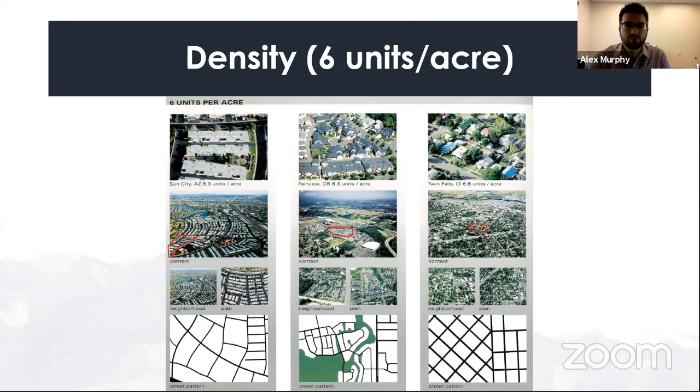That 6 units per acre, by the way, would be functionally equivalent to our single family 1 zone. This is about our single family 2 zone at approximately 8 to 9 units per acre. Again, you can see a variety of housing types. We've got on the left the Portland example that's right under 9, which is all single family detached. Tampa in the middle is really more of a mobile home park, but still kind of that same density. Chicago on the right has a little bit more intensity.

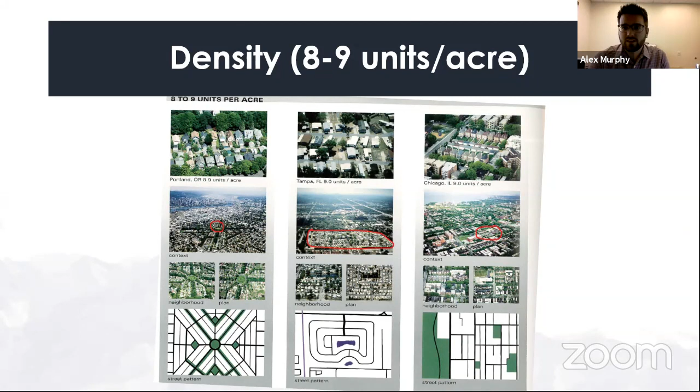And then on the high end, we allow up to about 12.4 at the maximum. Here's a few examples of what that looks like in a couple different places across the country. This book is here in the office if you ever want to take a look. It ranges from less than 1 unit per acre to well over 100 units per acre.

So you can get an idea of what that density looks like on a wide range of scales. The reason I mention that is thinking about density only is just one factor that comes into play when talking about residential development, whether it's single family or multifamily. There's a lot more that goes into development and community building than just the density.

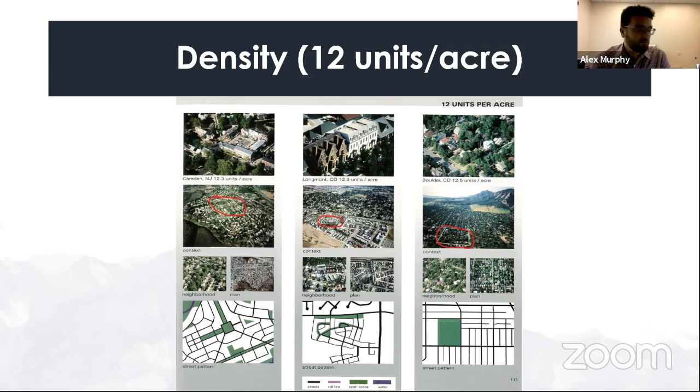Master plan developments are one way to see that happen. Master plan developments, or as some other folks call them, planned unit developments, are intended to provide flexibility in design and use. So you have a wide variety of housing types, unit sizes, etc. And in some places where appropriate, this includes providing mixed uses.

If you try and search for master plan development on the internet, you'll typically find a lot of conversation about large mixed use developments, where it's maybe like a movie theater surrounded by a shopping mall with apartments, that kind of thing. We don't tend to have that sort of scale in Midvale, but that's kind of the idea, allowing a variety of use types where they're appropriate.

Master plan developments allow the developers to consider overall community goals, and in doing so, typically receive exceptions to some specific or rigid requirements. That might be something like there's a density limit and a perimeter setback, but inside you can get some waivers to lot sizes or to building setbacks or various things like that.

Master plan developments typically result in common areas and common maintenance. So you'll have an HOA, you'll have a higher expectation of maintenance on some of those, because it's one entity responsible for maintaining a larger area. That typically allows them to provide amenities, design, and architecture that's not typical of your single family detached. That's true whether you're in Midvale, Salt Lake, California, or New York. That's generally how they're applied across the board.

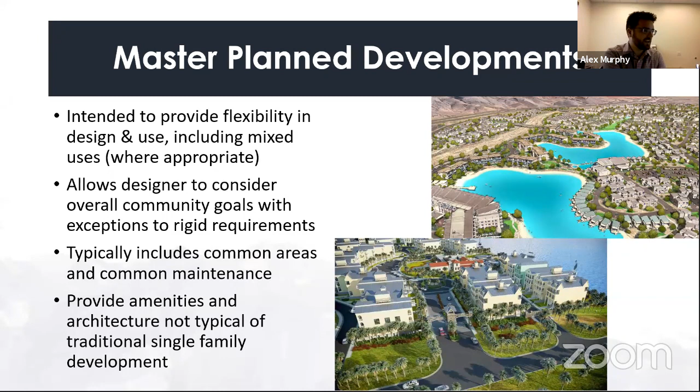When looking at them in Midvale, we've had master plan development provisions in the zoning ordinance for at least 20 years. I found it in a very old zoning ordinance that was originally adopted in the 80s, but I couldn't tell if it was adopted in the 80s or at some point afterwards.

In Midvale, we do have a minimum size requirement of 1 acre, so master plan developments aren't permitted on property less than that in size.

We establish a 50% open space requirement, which is the highest open space requirement of any project type in the city. Usually we're seeing somewhere in the 10 to 40%, depending on whether you're commercial, industrial, or multifamily residential. Master plan developments are expected to provide a higher quality development, so they have that higher standard.

As part of that open space, there's also a requirement for some improved amenity areas, including things like playgrounds, parks, picnic areas, sport courts, etc. We tend to provide flexibility to the developer in choosing what those are, because we don't necessarily have the market expertise to pick what should be installed there, but we do have that minimum area, so we'll get something as far as improved amenities are concerned.

We do require a pedestrian network, so there needs to be a series, or at least some sort of trail system, that connects within the project and to the surrounding public network. Typically, that means we're seeing connections from the private streets to the public streets, and then within the project between the units and the amenity spaces, so that folks can walk around conveniently and easily from space to space.

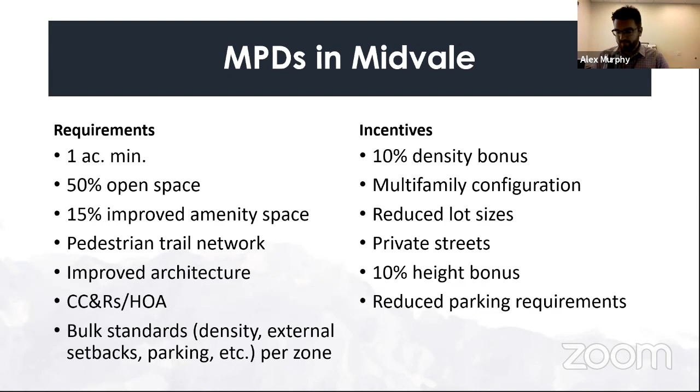To piggyback on that, they also don't necessarily have to follow the same quality standards in the road, right? Like how deep they do their asphalt, or require sidewalks on both sides, things along those lines, correct? Like with a private road?

The construction of the road itself isn't defined by the zoning ordinance, so usually it's reviewed by the city engineer, and if there are concerns, he'll call them out. They do typically need to build it to a standard that can support a fire truck, that's a pretty heavy vehicle. So we at least have that part for where the fire turnaround is. And most of our master plan developments are small enough that the road is where the fire department will be, so they don't really have the flexibility to create a substandard road anywhere else.

Sidewalks is one area. We do allow two options for sidewalks in our private road standards. You can either have a 5-foot sidewalk on both sides with a monolithic curb, so there's no park strip, you'd have the road, curb and gutter, and sidewalks. Or you can do a park strip and sidewalk on one side, so you'd have the road, curb and gutter on both sides, but a park strip and sidewalk only on one.

That option isn't used as often because it tends to create difficulties meeting the pedestrian network requirement. So we like to push people toward more sidewalks and less dead open space or dead landscaping when reviewing those projects. We'll really only accept, at least at the staff level, the single sidewalk if there's a really good network on the other side of the building, for instance.

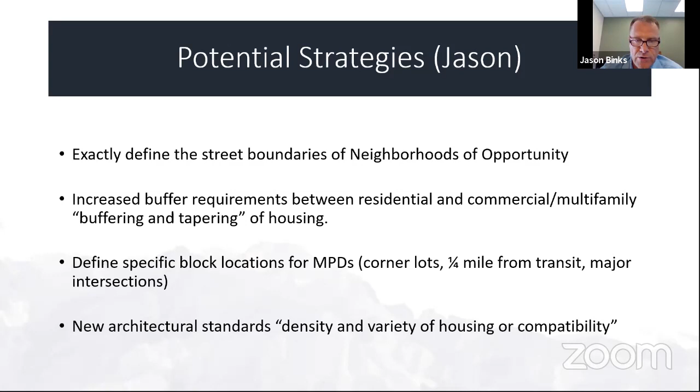And then finally, along the lines of what Councilman Glover was saying, when a developer comes in with a fourplex, for example, they provide a home product that's urban, chic, modern—different materials, different faceting, different bulk. That may not go well with a traditional single family home or a neighborhood developed in the 50s and 60s. So it kind of sticks out, it's different, and it causes some concern. So those are 4 quick ideas from someone who hasn't been in the city, but has been in different cities and sees these kinds of things.

Great, Jenna's going to take us through this.

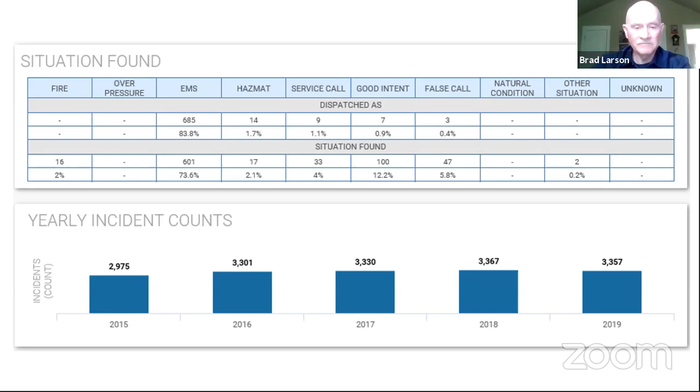The yearly incident counts, you can see 2019 count there. Of course, we won't have 2020 for a while. Top five fire dispatches: structure fires were 6 for the quarter, outside fires were 3 for the quarter. That's going to go up given last weekend, on the next quarterly report, and so on.

The top 5 medical descriptions that we were dispatched on: a sick person, that could be anywhere from a diabetic problem, COVID calls perhaps, or some other illness. And of course, falls is always quite high in the Midvale area.

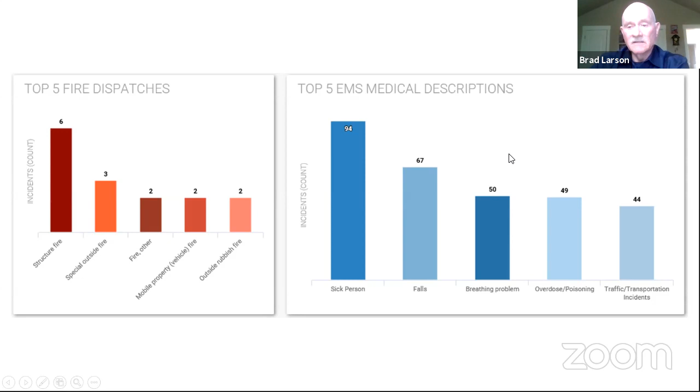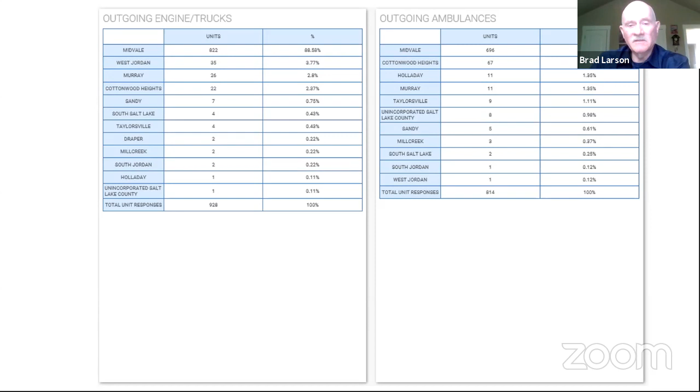So that gives us a good idea of our mutual response, the number of times other units come in to help us and the times that we go out to help them. Top 5 other dispatches - this just gives us the other calls that we went on and the number of times.

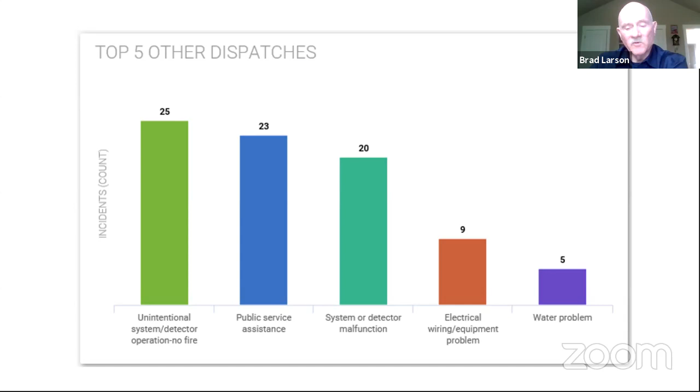Okay, are there any questions on any of those?

Okay Chief, I actually have a question. Sorry, I was trying to hit the right buttons here. Here I am. So back to that slide.

Does it seem that we're a little bit more generous in the number of times we send our response teams out versus other communities sending theirs in?

Yeah, and that can vary from month to month, you know. It's dynamic. I mean, we can look at the numbers long term. It really helps us during the board meetings and budgeting and those type of things when we're looking at all those numbers as a whole for the board members to talk about, to make sure that things are fair and equitable.

However, keep in mind that a lot of those are UFA units. They come out of Cottonwood Heights, they come out of Millcreek. And the same as when we go in to assist them. For example, some of the large field fires or house fires that we may have here in Midvale, we've got plenty of resources to pull from.

So it's a real advantage that way. And departments all across this valley have mutual aid agreements. And there's always the question of, well, we're sending more here, but next year that might change. So we just have to kind of keep an eye on that and make sure it isn't a burden on the community we're based in.

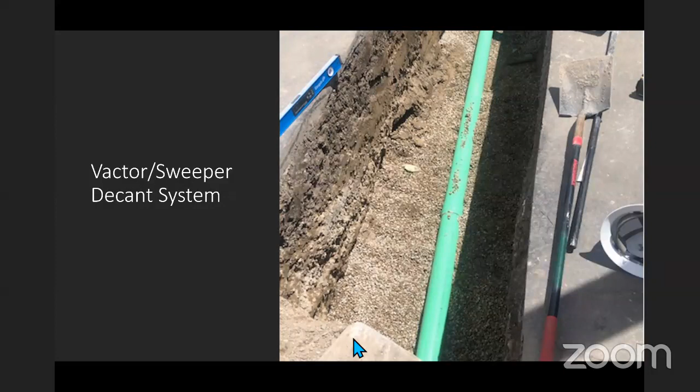Sweet, thank you, sorry. We found a line that was installed with a belly in it, and Roland's crew, the Storm and Streets crew, went in and replaced it. The benefit here is we were having to spend at least one day a week maintaining that system and cleaning it so it would function. Since we've done this, three weeks ago, we have not had to perform any maintenance on it yet, so we're probably looking at going from once a week to once a month. That was really good by their crew. That's what the patch looks like after. So some time saving on maintenance in the yard, which can be spent on maintenance in the city.

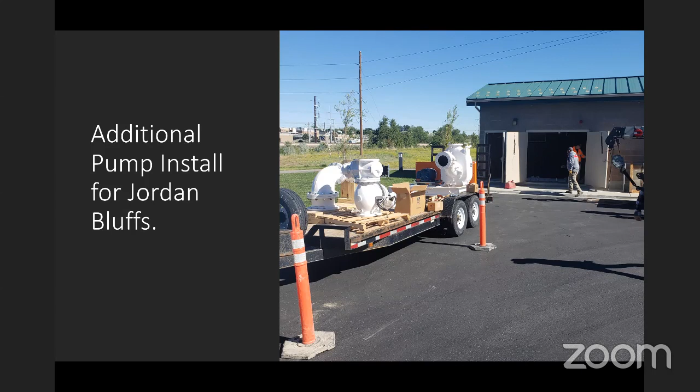Additional pump install for the Jordan Bluffs. This kind of segues into impact fees, where we don't utilize impact fees—this is an example of maybe where they could be used. As Jordan Bluffs comes online, they're going to increase the sewer load, and we needed to install a third pump in the south lift station. It was a tricky project, but our guys did it internally. You can see right there, they're lowering the last spool piece in. It was wired up and test ran today, and it's all good.

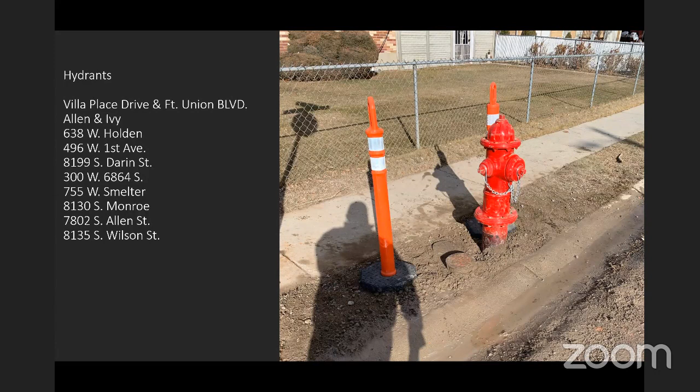Last fiscal year, you provided quite a bit of funding for the water system. We've replaced 10 hydrants in the last fiscal year—the addresses are there, and along with those hydrants are the aux valves, which you can kind of see there. We've gone back, replaced the landscaping and any asphalt that was disturbed during that. We are in the process of going out to bid right now to get 10 more for this next fiscal year. Same with the valve program—we replaced, I want to say, 11 valves this last year. Lots of work. Streets are probably a little frustrated because they get to come in after and replace asphalt and sidewalk, but the water system is being maintained.

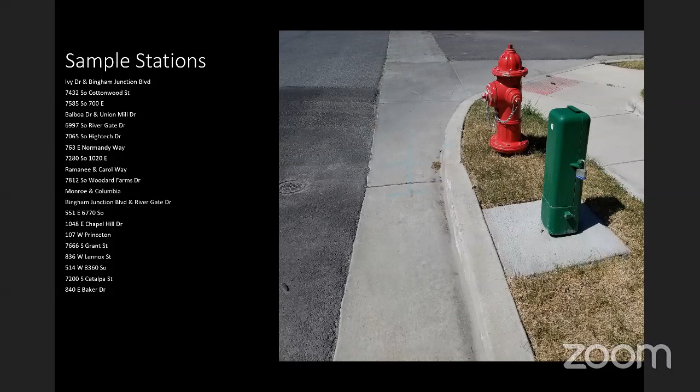Quick update on the community center—that's the pavilion. I don't know if any of you have been down there to see it, but it's quite impressive. We are still looking at an early August completion date, and hopefully we'll have some pictures of the inside next report.

To wrap up really quickly, parks. We've had a lot of irrigation issues in the main park this last 3 or 4 weeks. A few mainline breaks and then a programming issue on one of the clocks. Some of the grass over there doesn't look great, but we think we figured out the programming issue this afternoon. If you get some calls on increased watering over the next couple weeks, we're trying to bring the grass back, but it will be normal watering after that.

I would also like to thank Candy and Alan Tippett. We've had a few meetings with them, and they have been very helpful and supportive with a few responsibilities in the park, keeping the tape up on the playground, pulling garbage cans out so that Ace can get them, filling doggy poop bags, and a whole host of things. They've been very, very helpful. They're wanting to get an adopt-a-park program started, and hopefully we'll find time to work that out with them. I just wanted to give them some credit. So that's all I have. Any questions?

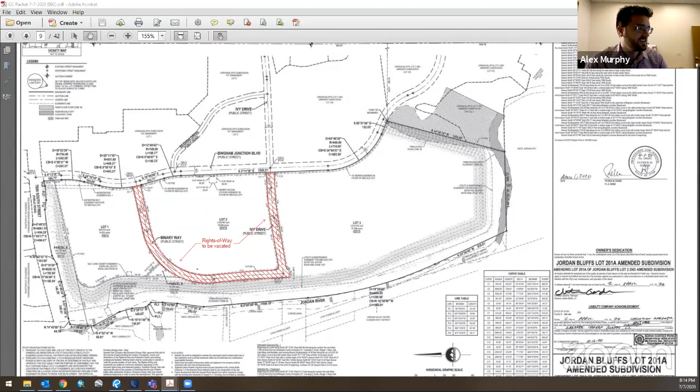So at this point, we're just looking to have a public hearing and see if there are any comments. And then if the council is on board with this proposal, we'd request that they give us some direction to prepare an ordinance to finalize the vacation alongside some of those later review decisions.

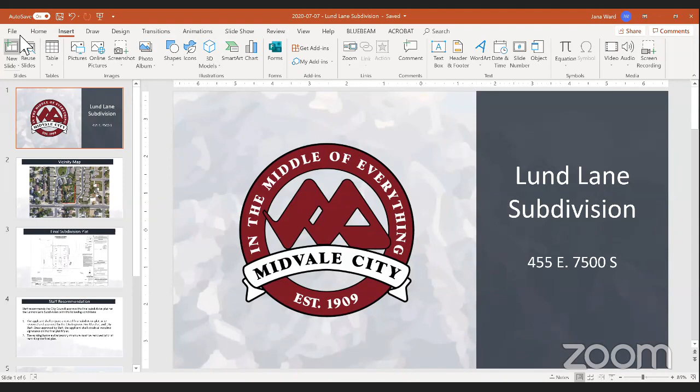Yes, I'm here. Just give me one second to get the slide. Okay, so this is just an action item on Lund Lane subdivision at 455 East, 7500 South. I'm going to share my screen. Do you guys see the screen? Can you guys see the screen?

Okay. Yes, we can see it. I'm sorry, I'm just going to go this way. So the only conditions: the Planning Commission conducted a public hearing and then issued a recommendation on April 8th, and the City Council conducted a public hearing on the subdivision plat on May 13th, 2020, and approved the preliminary subdivision plat with 3 conditions. These 3 conditions were notes on the plat that were added to the final.

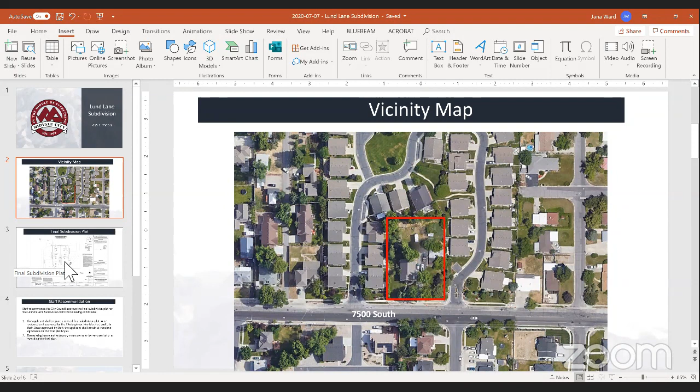The only things that we need to address at this point are just between the city engineer. He asked for a couple of corrections regarding grading and drainage, which came from public comment. The easements on these drainage points, on these retention ponds, were added to the plat, and these are all the notes that were required. Staff recommend approval of the final plat

with those revisions from the city engineer, fire marshal, and city staff. And once it's approved by staff, the applicant shall obtain all required signatures on the final Mylar. It's also a requirement that existing homes and accessory structures must be removed prior to recording the final plat, because the property lines will go over existing buildings.

Any questions? The only question I had is looking back into my notes, we didn't have a meeting on the 13th of May. We had meetings on the 5th and the 19th. Oh. Well, then that would be a typo in the staff report.

Jana, the 13th of May was a Planning Commission meeting. So that's what, yeah, that was my confusion, because it says there was the Planning Commission decision, and then there was the City Council public hearing, which of course we didn't have on the 13th. Okay, I'll have to look at that staff report then, and we'll have to revise that.

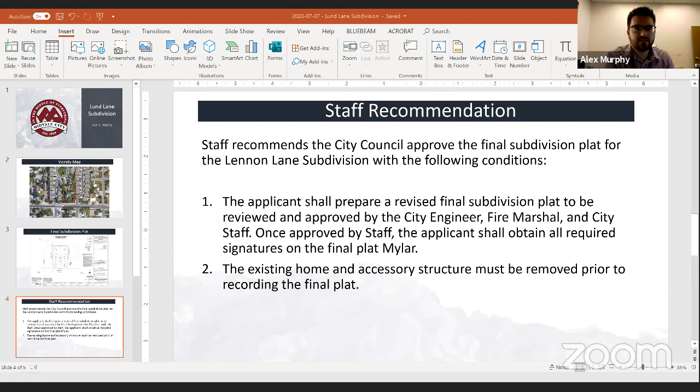All right, Alex, now what about Jordan Bluffs and Zion? Jana, could you stop sharing your screen, please? Okay, I don't have anything to share on this one. I just wanted to make sure you could all see me.

So for this discussion, I'm actually going to have Gardner and WRNS, who are the architects for Zion's, set the stage first, and then I'll dive into the staff report that we sent out with the packet. So Brian and Brian, you guys here and ready to go?

Yep, we are here. I'll just really quick, just for the council's benefit—I'm getting a tiny bit of feedback, but I just wanted to introduce you guys. I can't remember if we've introduced you in the past to WRNS, but they are actual world-renowned architects. We have Brian Millman and Bryan Shiles. We worked with them multiple times in the past. Would everyone please go on mute that's not talking? We're having a lot of problems, I can't even hear him. Thanks. Okay, Mark, go ahead.

Hey, thanks, Mayor. We've worked with them multiple times in the past on projects in Utah. They're out of San Francisco. They both have worked at WRNS for many years, as two of the principals of WRNS. Bryan Shiles currently—well, I guess pre-COVID—teaches at Ohio State, I believe UCLA, and has a master's degree from Harvard, and also teaches at Stanford.

So we have the architect on the scene, and it's quite fun. We're going to have these guys walk us through the thought process of why we tweaked the site plan, as some of you have probably seen. I'll turn it over to Brian, but we're here if you have any larger scope questions. Thank you very much. Thanks, Mark.

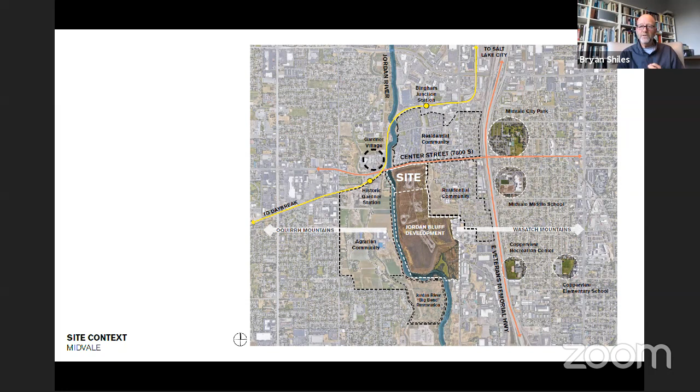We look to make connectivity and continuity across the boundaries of the site, because this development doesn't stop at its edge. We want to tie into the community at large, so we're always looking for ways to do that.

So the next slide shows where the site plan was, and I'm going to try to speak factually about the aspects that this whole team wanted to change. Especially north of the site, north of Ivy, I would characterize it as disconnected buildings surrounded by seas of parking. The central park, although a good idea, we thought there was an opportunity to connect it to the natural landscape more strongly. We also thought there was an opportunity to create a different kind of development than what is depicted here: one of connectivity, walkable streets, a community within this site, and more sense of community in how the architecture, streets, public spaces, and connections are arranged. So let's go to the next one.

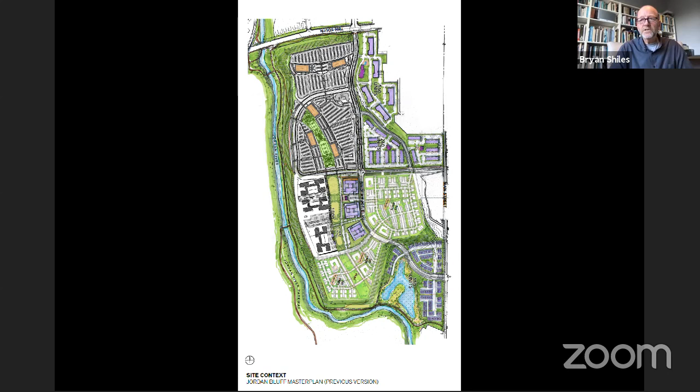On the west side of the site, lining the Jordan River, is Bluffside Park. One of the things the Gardner Company wanted to do is make sure everyone in the project was within a very short walk to a natural amenity. So that park is now a long linear park that everyone has access to, and it really leverages the Jordan River and the restoration to the south into the character of that park. We think that just amplifies the park and the experience of being there.

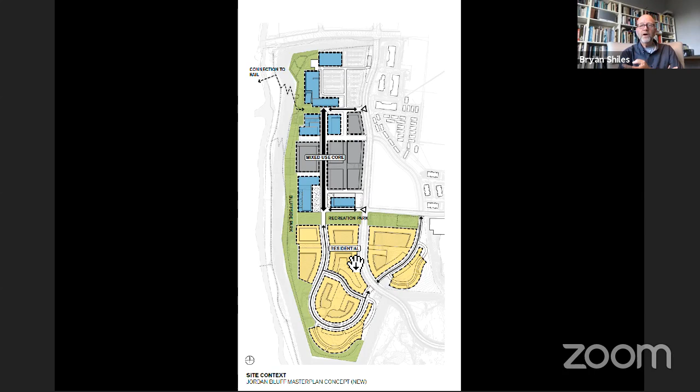To the north of Binary is the Zions site—we'll get into that in a little more detail. You can see the connection to rail right there. We're working on a heavily landscaped and, we hope, very pleasant connection from rail into the heart of the mixed-use core, along the north-south axis going down to the east-west park.

And you can kind of see the intent here, I hope, of making something that is about streets, squares, parks, and a public realm. Next.

A little bit more coming next into the... whoa, it's distended on my screen. I hope you guys can see this okay. Let's go, yeah, it's okay.

Just a little bit about the Zions site, which is north of Binary. There's about a 400,000 square foot building in an L-shaped configuration, which we see as really the cap, the cornerstone to the north-south street. The building has a lobby, like a porch or a dog trot, that goes right through the building. There's a southern entry, which we think will enhance the public plaza to the south, and a northern entry, which connects to all the parking—1,600 cars, 800 in the parking structure near the north side, and 800 stalls on the surface. The building is meant to connect to Bluffside Park to the west and be a strong anchor for the north-south street to the south.

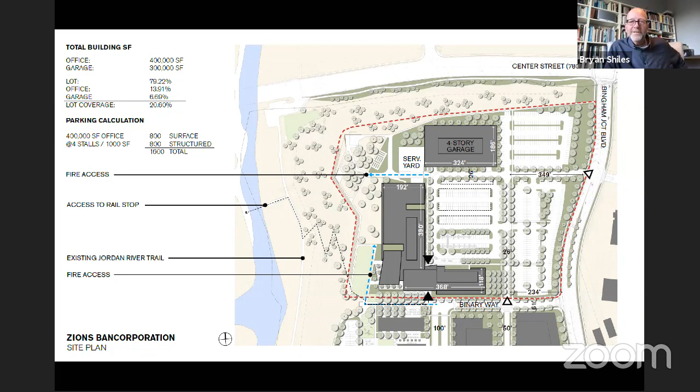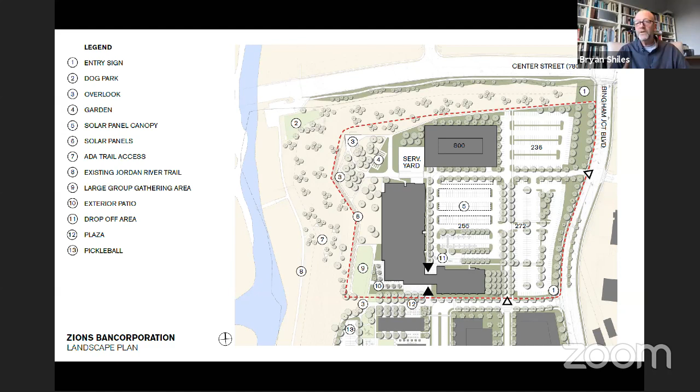Just a couple of things we're looking at here: there's a whole suite of public amenities, from a dog park to gardens and overlooks. We're looking at a fair amount of solar panels here—Brian is going to get into the sustainability aspirations of the project a bit more. But this is really meant to show how important the landscape is to this project. The buildings are, of course, important, but connections to the landscape through trails, connections to the train station, pickleball courts, etc., are an important part of this project.

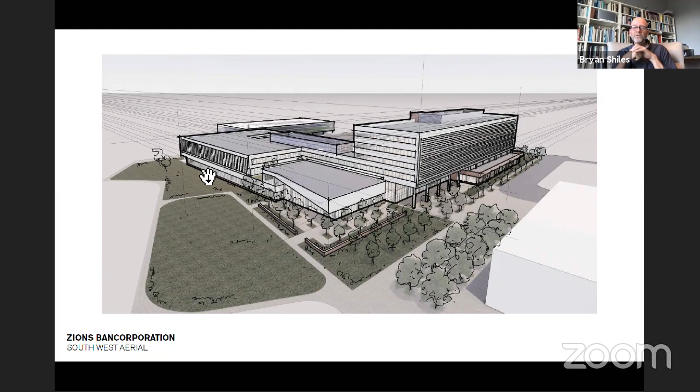Next, we're going to see a couple of massing sketches of the Zions project. We're in the southwest corner of the project right now. You're seeing a 6-story volume, which is the cap to the major north-south street. In the corner there's an all-hands space, a double-height space that will hold 700 or 800 folks, which spills out to an exterior court and takes great advantage of the beautiful prospect to the park. You can also see the west elevation of the building connecting to Bluffside Park.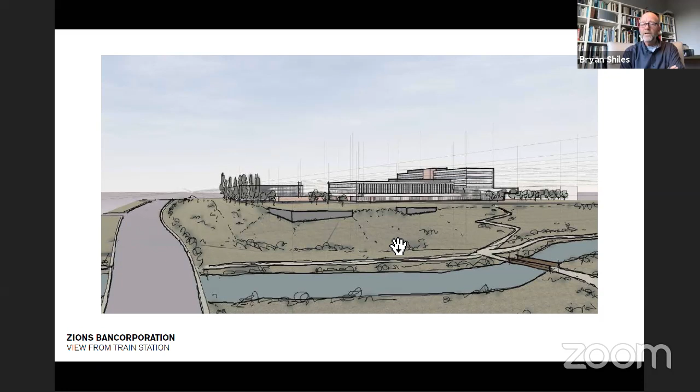Next, we'll see a perspective looking up the north-south street, showing that 6-story volume with a porch-like entry to the left of the image. Now we're at the train station, more or less, and you can see the connection across the Jordan River—the footpath that will go up the bluff and connect to the heart of the project. You can also see the prominent position of the Zions project on the bluff. We think it offers a good perspective to 7800 South, and a real cap for the overall district planning.

Sustainability is super important to the community of Midvale, but it's also very important to Zions and WRNS. We often push sustainability in many ways, and this has been an incredible project because of the reach it's taking, unlike a lot of projects we work on. There's a goal for the Zions project to hit LEED Platinum, which is quite an undertaking—it's a lot harder now than it was 5-10 years ago. That's a huge thing.

There's a push to be close to net zero energy and offset a lot of the energy used by the project with on-site renewables. Zions made a really important decision, huge for long-term global warming and the use of fossil fuels, by pushing for an all-electric mechanical, heating and cooling system. Often those systems are powered by gas, and by going all-electric, Zions has essentially gone all-in on the concept that renewables are the future, and that we need to be careful about how we use carbon.

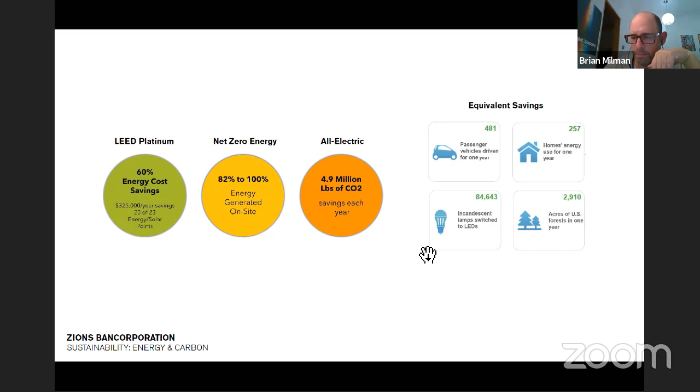One of the key things about this project is its desire to push health and wellness. As Brian was alluding to in the renderings we're looking at, natural daylighting and views are very important, as is making sure we use healthy materials throughout the project. Clearly, the air we're pushing around the project is very important, and we've been looking at much more enhanced filters than what you typically see in a lot of office buildings.

Recreation, one of the big things about wellness is making sure people are connected to the outdoors and are exercising. So this site is already set up to accommodate that with its adjacency to the trail. A huge amount of bike lockers, bike sharing, showers and locker rooms connected to the park for employees and staff will help promote use of the trail and hopefully get cars off the streets and promote people commuting to work. And then there's a goal to have a cafe in the building, with super healthy options for eating and to promote healthy habits.

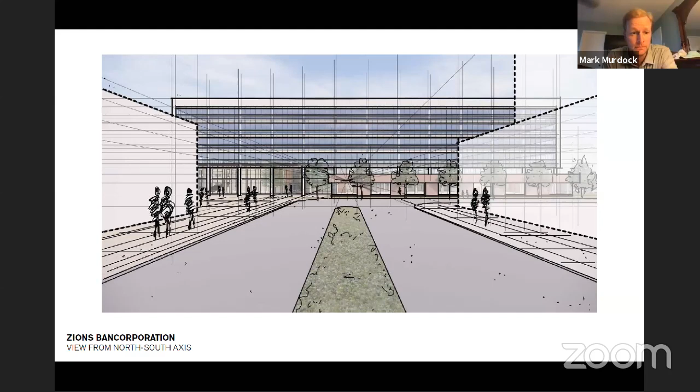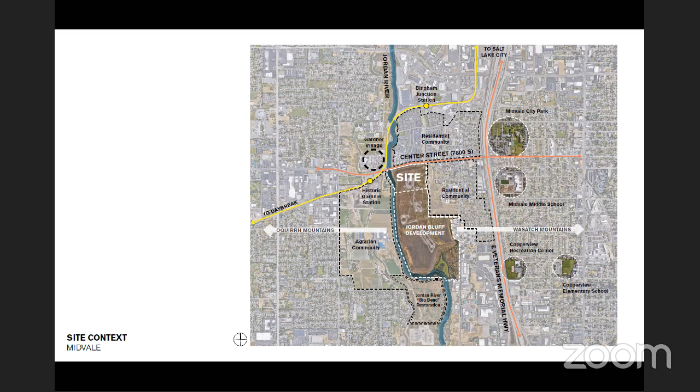Yeah, Mark, I personally don't love the 4-story garage as what everyone's going to see. How's the front of that going to look? I envision this being like a jewel—Center Street's one of the most driven roads by people from West Jordan when they go to state. I thought for sure we'd have this building everyone can see, and now they're going to see a 4-story parking garage. I hope there's some architecture with that, because I personally think that's terrible.

Yeah, good question. We've actually talked with staff quite a bit about that. I'll let Brian Milman respond, he might speak to it more educated than I would, but the answer is it'll definitely be screened, and we've been working on that. But go for it, Milman.

I know Alex has been working with you, Mark, and others to put together requirements for the garage. One key aspect of the garage design is that it ties into the architecture of the buildings adjacent to it, so there will be materials on the office building that we'd also place on the garage to help screen it. There's also a lot of thinking about burrowing the garage into the grades, which works out respective to the soils there, and that will greatly limit the appearance and height of the garage as viewed from Center Street. But it will be clear it's a parking garage, so that's what everyone will see when they think of the Zions building, unless they're driving down Bingham Junction.

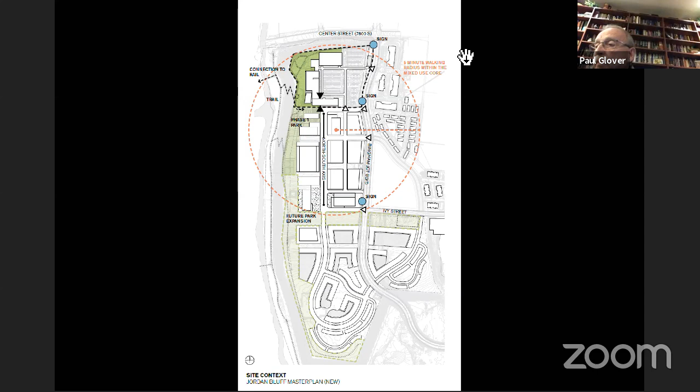Hey, this is Ben Seastrand with the Gardner Company. Is it okay if I address some of these comments a little bit? Sure, go ahead. Excellent, thank you.

I think Alex and Brian and everyone's done a tremendous job of walking you through a lot of information that I know you haven't had a lot of time to digest. But I'd just reiterate - Paul, Councilman Glover, Councilman Brown - we could set up a meeting to talk in more detail on your concerns.

But in terms of the park, Alex mentioned the acreage has actually gone up from what it was in the iteration you saw before. And we're still committed to every amenity that we'd shown on that list within the zone - we're still committed to having those within this park. Obviously you can see it varies, there are some pinch points, but overall the width of this park does not vary very much from what you saw beforehand.

Something Bryan Shiles talked about is we really like the way this park, rather than being in the middle of this private development and private buildings, by pushing it out to the west, still has access to the Jordan River, but it's now visible access. It really makes it feel larger and bigger. The slope is not included in our acreage counts of the park area, and we just think the way this runs lends itself so much better to public access and inviting the public to come and participate and use this.

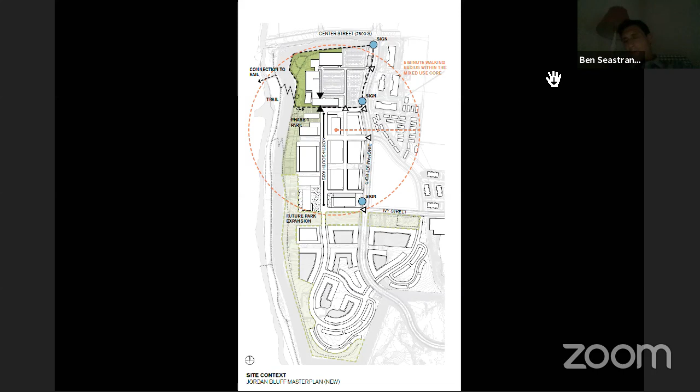Hey, if I can add one more thing - sorry, my internet's been a little spotty. The acreage of the park we're talking about right now doesn't include what Zions is doing here, so we're actually picking up extra acreage with Zions. We're 15 plus acres on everything just to the south here. I just wanted to clarify that we're actually picking up extra park area. But yeah, as Ben's saying, we're more than happy to chat with anybody and walk through some of the changes.

And I'm sorry you're getting them last minute. That was never our intention. But just wondering if there's any other questions by chance. We'd love to field anything else, or if there's anything else, Councilman Brown or Councilman Glover, that's on your mind.

So I have another question. In your original renderings, the slope had a lot of solar on it, which I thought was cool. Are you guys still planning that? So the current plan with Zions, and we are not finalized on this plan, is to have solar panels here and then potentially there as well. But the idea is to have the park be fed as much as possible by the solar panels on the hill.

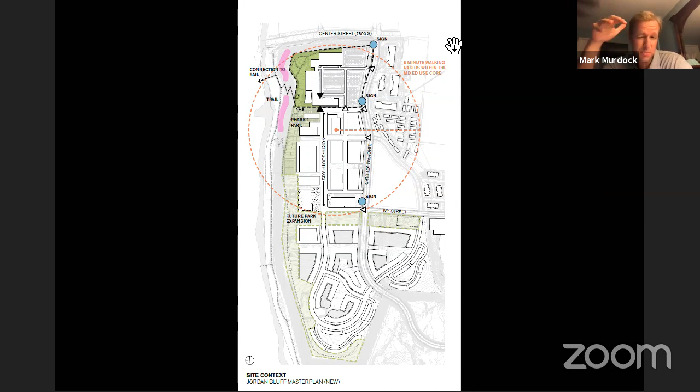But the rest of that slope, will that eventually have solar panels for residential? Yep, that's the idea, is that right now we do Zion and...

You kind of broke up there, Mark. I'm sure it was really cool though. Whatever you just said was probably really great. All right, when you get your internet back, Mark, restate that.

This is Kane. I think what might be helpful is for Gardner to come back with a proposal on how to utilize the green space, so it is a usable park area, similar to what they did with the original park plan, and show how some of the amenities can go in there. I had a hard time when I first saw this design. I was struggling the same as the council was, and still am in some respects, but I've been assured that all of those amenities, the pickleball courts, the athletic fields, and those items that we were shown in the beginning would fit in these areas. So I think that's what would be helpful for our council to see now is how this park could be programmed.

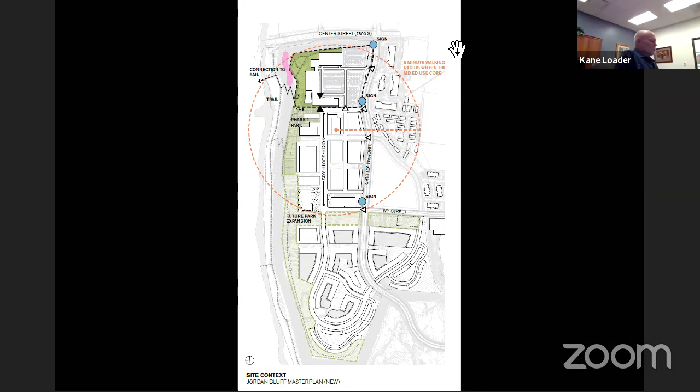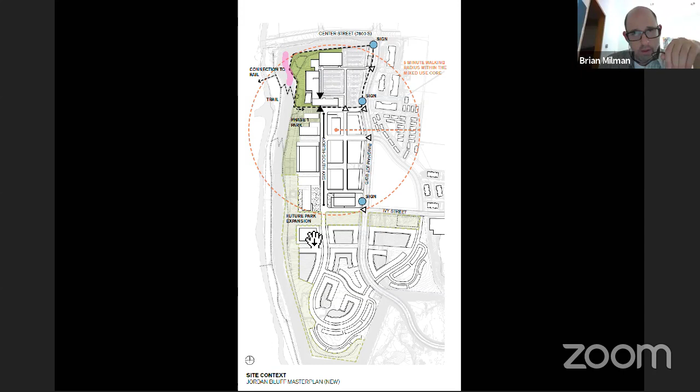Agree. Sometimes just looking at this image, the scale can be a little misleading, because the site is so large that sometimes the width of some of these spaces, you can fit fields of sports activities along this. So I agree with you, Kane, that if we zoom in there and start to show the actual layouts that we're proposing, then it starts to give you a different kind of scale.

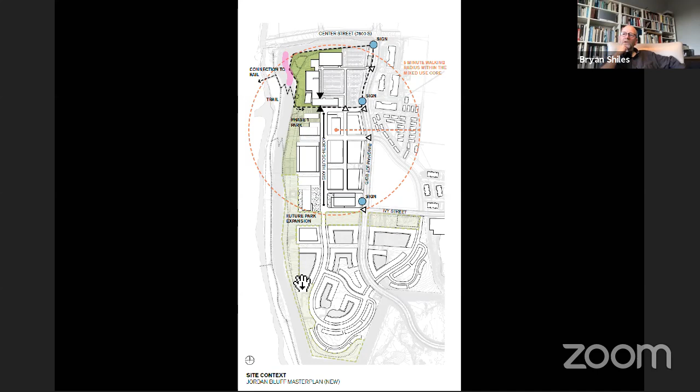Hey, Brian, we might re-reference the soccer field, which is at the east end of the recreation court. So just for scale, that shows you the size of this. Of course, the soccer field is pretty wide. But I hear that too, and I think we can come back with more detail there. Absolutely, Kane, I think that's a great idea, and that's actually being worked on right now, so we'll have time as soon as we have that. It's obviously, I mean, we're going fast and we're trying to program a large space quickly, but it'll at least give a sense for the scale and how we can amenitize this park, what we're thinking, why we're thinking this is such an upgrade.

Hey, I'm sorry again. Councilman Brown, did we get all your questions answered? Yeah, I was just wanted to make sure that hill was still going to be utilized for that and it wasn't going to be the city's responsibility to maintain that. Correct, that is correct. I was really sorry about my internet, but yes, that is correct.

So one thing I want to draw your attention to as we talk about the future, we're on a pretty short time frame, and we have been working under a very, very short time frame with this project from the beginning. I know that this is a pretty dramatic change. Part of the reason we haven't brought it back to the council beforehand is that we have gone through many iterations of this layout, and it wouldn't necessarily be the most helpful for us to bring a proposal in front of the council and then come back two weeks later and say, actually, no, we're on a different one now. So the reason we brought this now in this format is because we've been working through many of these topics internally, and we've been trying to see what we can do to get them addressed beforehand.

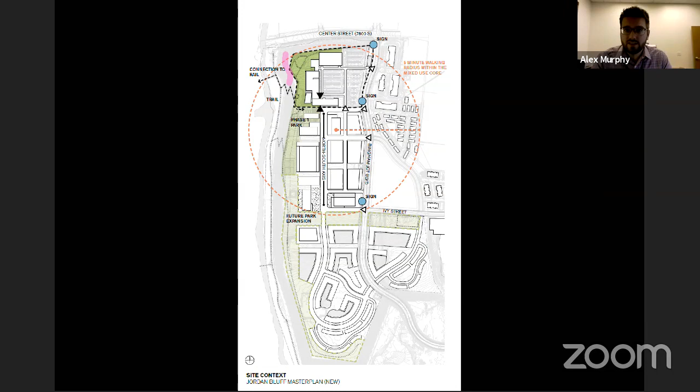So I totally understand, it's just as important to them as it is to us. Yes, I'm just trying to make the consequences clear, so that a proper balancing can be met. We actually talked about programming out the space last week, and if that's something that can't be done in a week, then the question arises, is it worth postponing the entire project for that to be finished? And I can't answer that question for the council. There might be other changes that need to happen here. And so the calculus is: is it good enough, or are we willing to postpone this flagship project on this site?

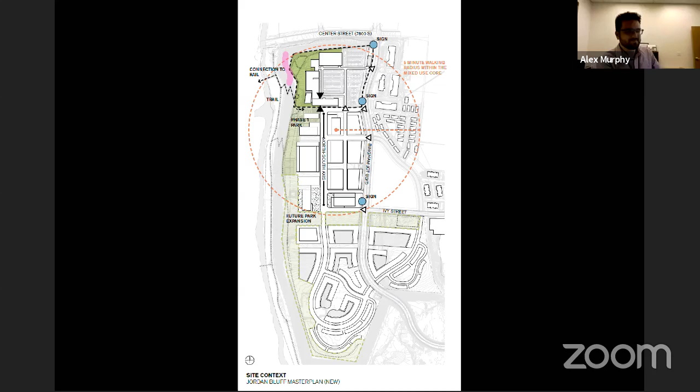Alex, I know you can't answer for the council, but the council can answer for the council, and that's why I bring it up. In my opinion, it would not be worth postponing the entire project if we're just concerned about what amenity is going to be at what part of this map we're looking at right now. So I'm not interested in postponing the project for those reasons. I see this as just a matter of putting things in different areas. And this isn't a matter of a developer going back on their word about what they told us they were going to be doing. In fact, to me, it makes more sense to do it this way, especially to put the park where nature already exists instead of between concrete. Makes perfect sense to me, and I think it would be an easy selling point to the community.

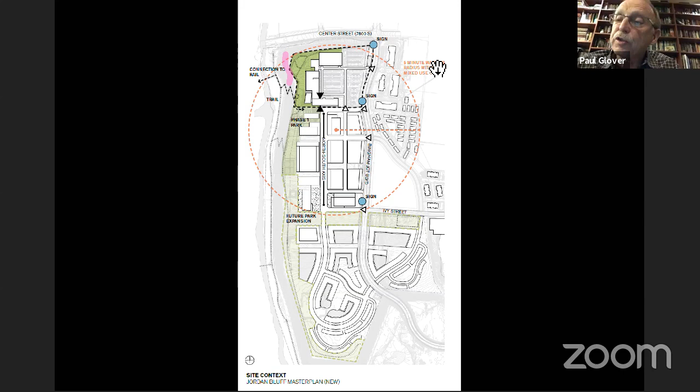Well, I, for one, would like to meet with you guys and go over the park. That's my biggest concern, that we're going to get a park that's usable and that citizens can come and use. So if you can help me understand that, that'd be great. Yeah, we'd be more than happy to meet with you, and we'll contact tomorrow to schedule some timing. But yes, we appreciate it. Would welcome that. Thank you so much. I'd like to be a part of that meeting as well. Great.

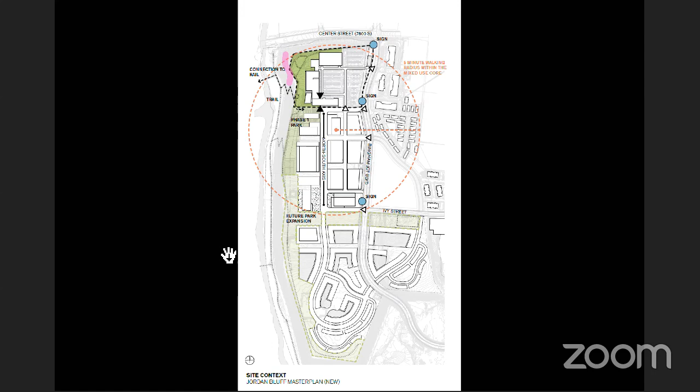Sorry, who was that? I didn't have my... It's Councilmember Robinson. Okay, I'll reach out tomorrow. I mean, I would too. We obviously can't all meet together at the same time. Yeah, we'll do some separate meetings. Is there any other council member that'd like to meet, just while I'm writing this down? The mayor would like to be part of a discussion too. This is Quinn Sperry, let me know the times and I can come to one of them as well. Okay, sounds great, we'll do 2 or 3, whatever's needed. You may as well include me now that everyone else has said yes, so I don't want to be the odd person out. Done deal.

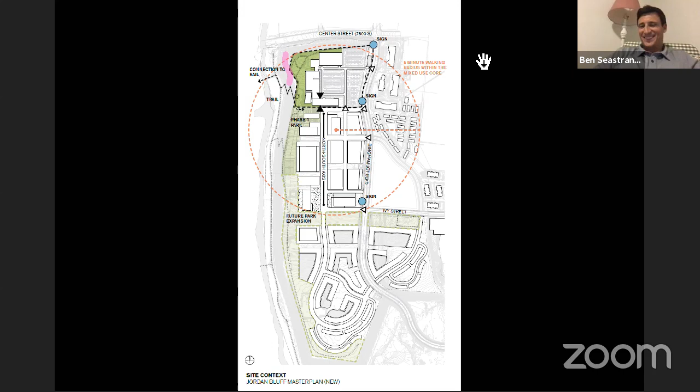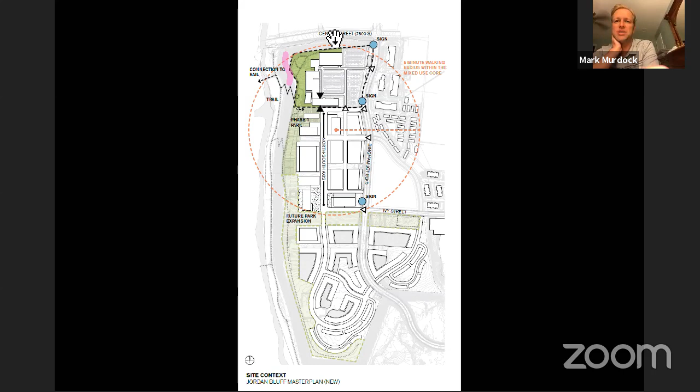Okay, do we have any other discussion then that we need to take care of at this time? You'll get back with us then, set up the meeting schedule, and we'll join together. Yep. Thank you so much for your time and the feedback, we'll be in touch tomorrow to schedule. So thank you very much. Thank you, Mark. Thanks to all of you.